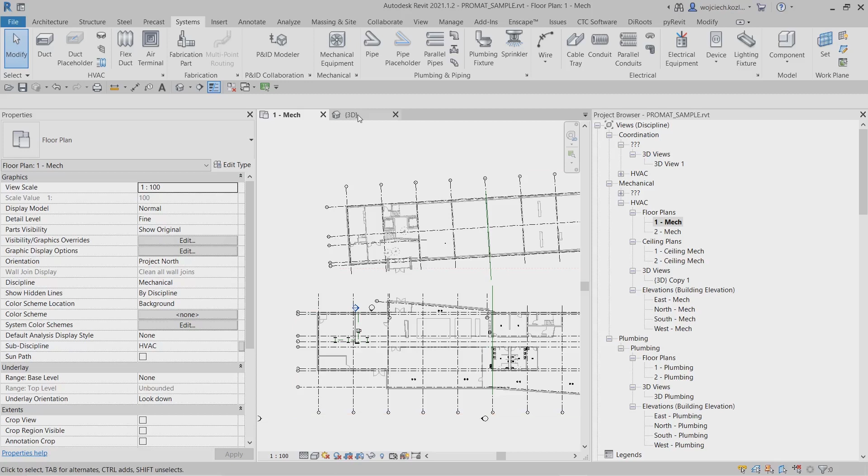In the next section of the film, I will present the process of modeling a part of the smoke exhaust system in a building using the Promat libraries. I currently have an open project that already contains a system component library.

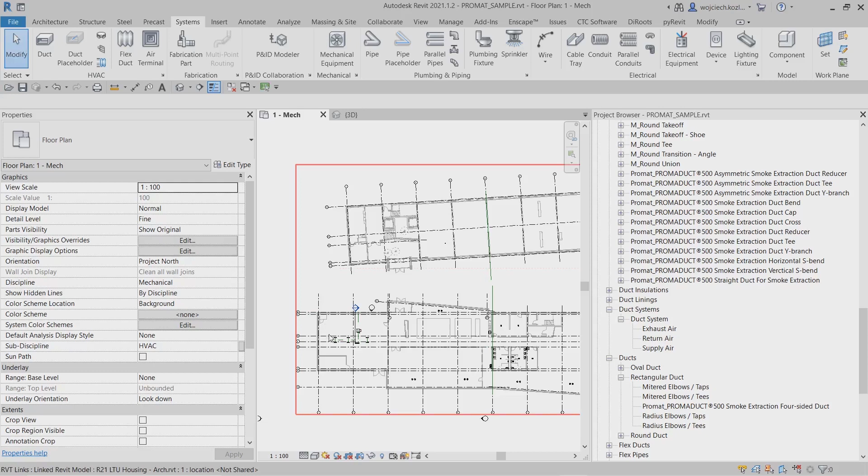The easiest technique to transfer libraries from a Promat template is to copy the content and paste it into an existing project in one Revit session. We can start the modeling process from defining the requirements, for example, the amount of air removed in a given room. We can place grills or set up a device, for example, a fan.

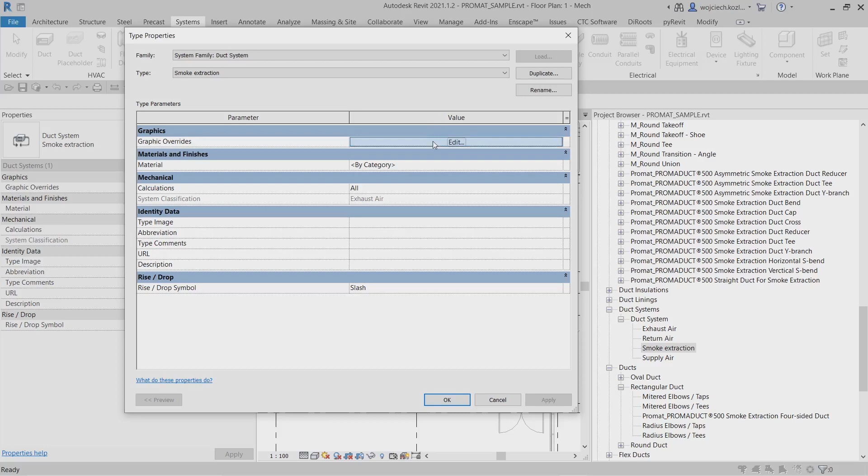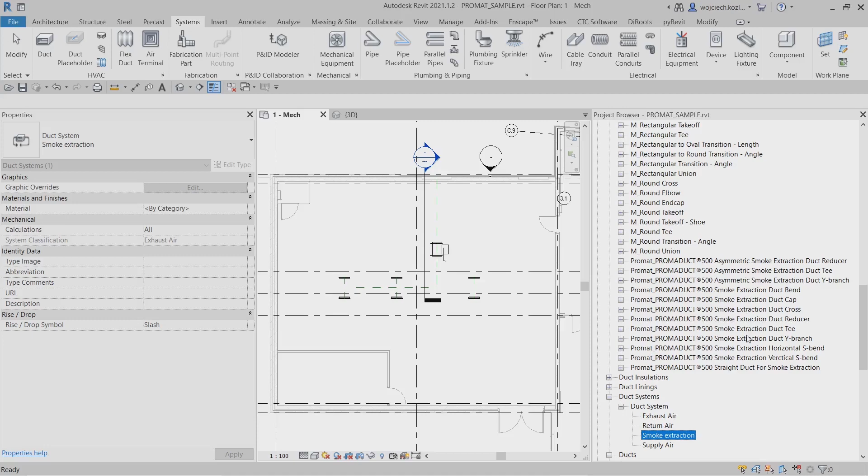Each system in Revit should be properly classified, so it's worth creating it by copying the existing one. In this case, it is the exhaust air system. After copying the Promat libraries, the smoke extraction duct system is already available for use. If we have already placed air terminals and equipment, the first step is to create a virtual system with linking elements in group.

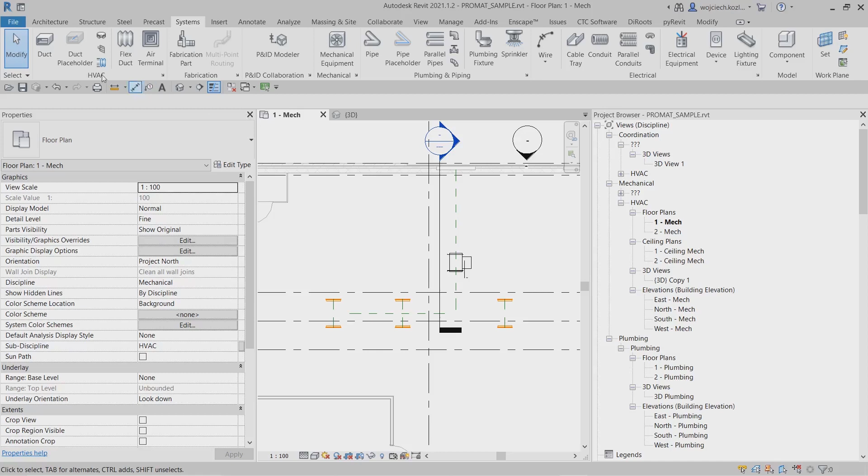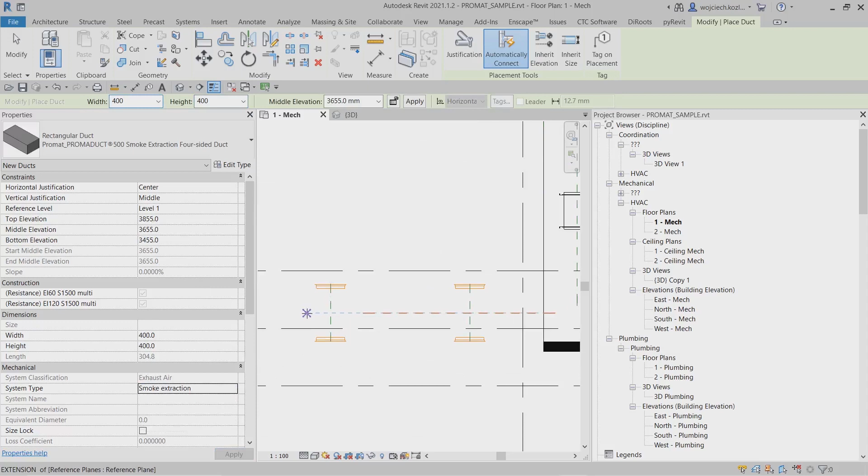In the next step, I will start by drawing a straight line segment with the Promat duct system. Before starting, we define the size of the duct as well as the elevation and the system type. Standard fittings are automatically created during the drawing of the ducts. The designer can modify the duct fitting using native Revit options. The elbow will automatically turn into a T.

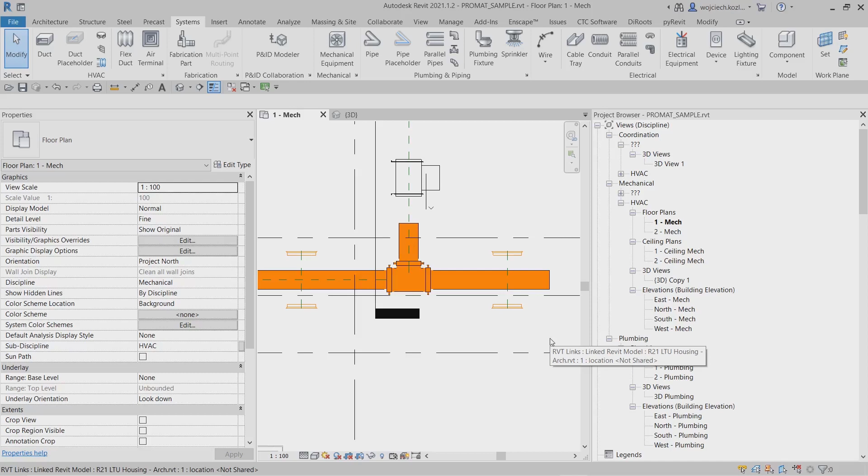If you want to draw the duct further, it is enough to select the fitting and use the Quick Drawing option coming from the duct connector. Connectors that have predefined dimensions.

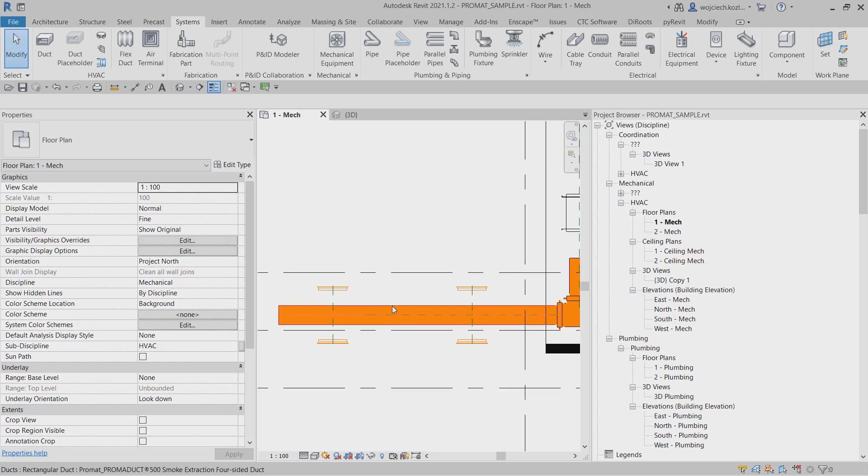In the next step, I want to draw a cross connection. In this case, you can draw two intersecting ducts, but this will work correctly only for standard cross fittings that have the same height on all outlets. In the case of the Promat cross fittings, it is also possible, but I think it is better to draw a T first and update it to cross. Thanks to this, we control which connector is the main and which is secondary, with a different height.

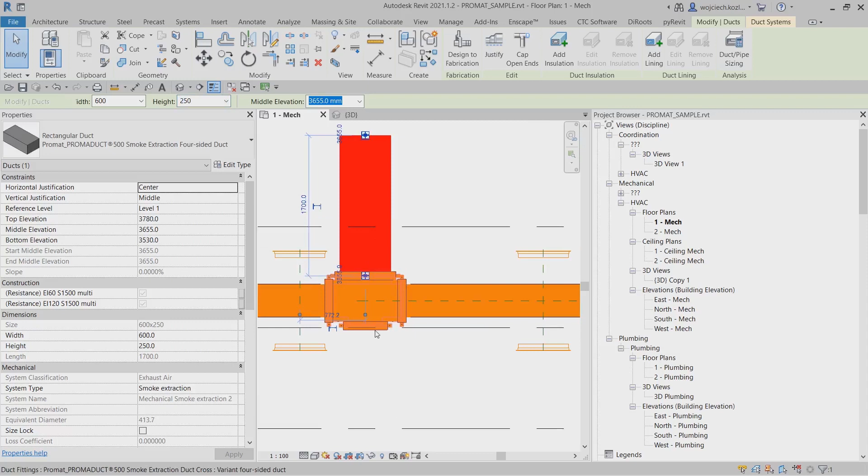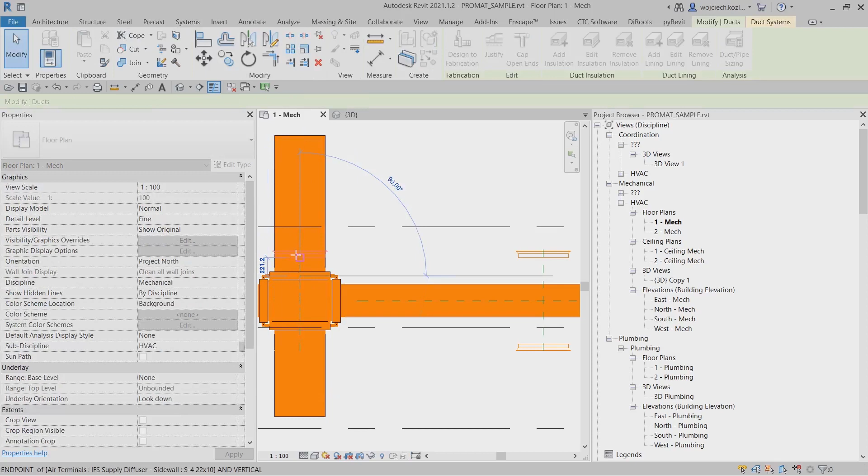After placing the cross fitting, you only need to draw the connections between the grills. Such a configured connection can be copied to another similar place. In the case of copying, you will often need to break the duct into smaller parts or delete and redraw it. I will finish the rest of the places in the same way.

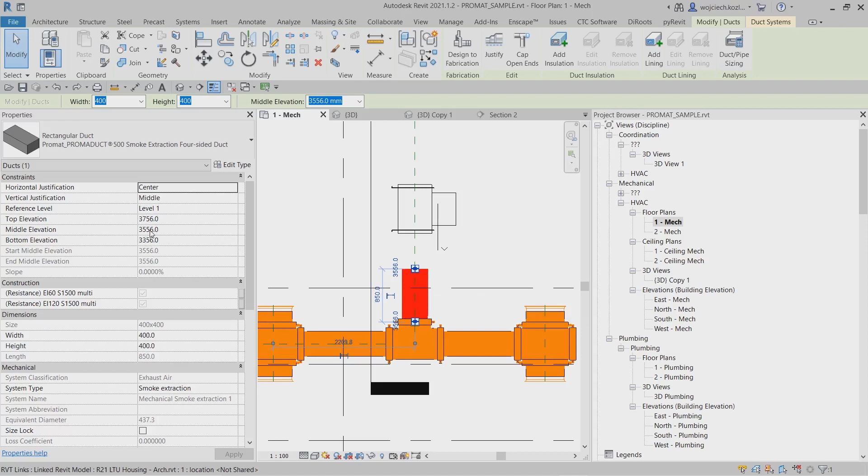Let's move on to a non-standard fitting. In this example, the axis of the duct is not on the same elevation as the fan. Therefore, I will use a vertical offset. First, non-standard elements should be placed on the existing duct and then adjusted to the project using parameters.

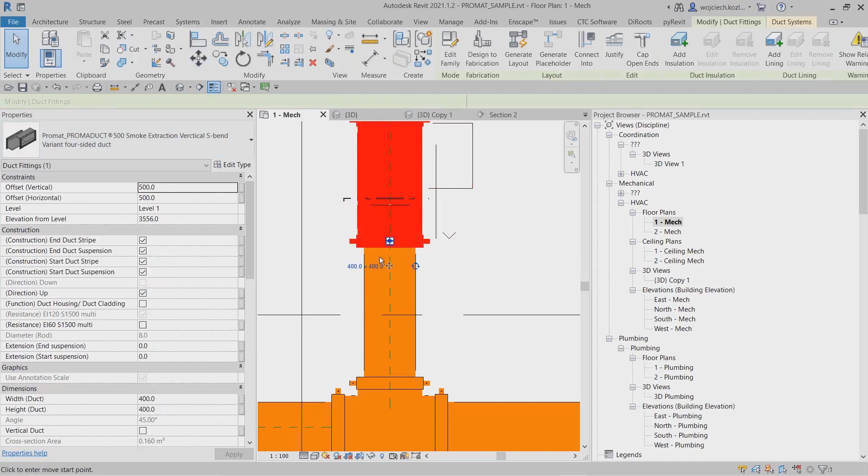In order to see how far I move away from the duct, I will create a section view and measure the distance. Then, I will set this value into the Promat family using the dedicated parameter called Offset (Vertical).

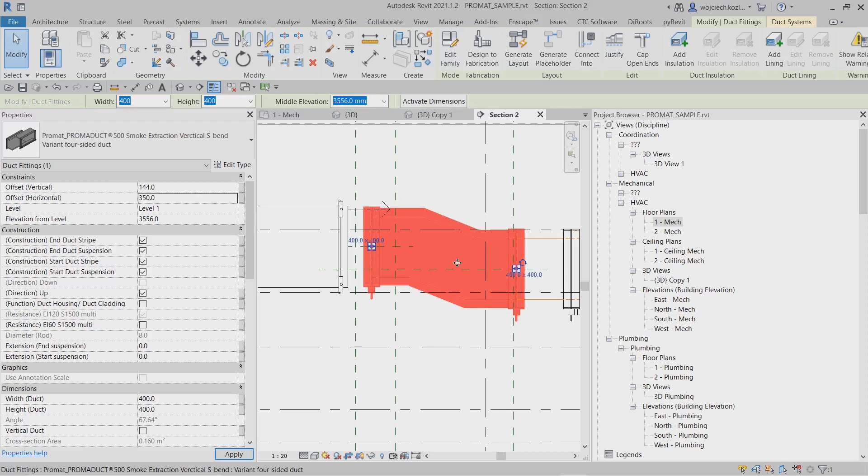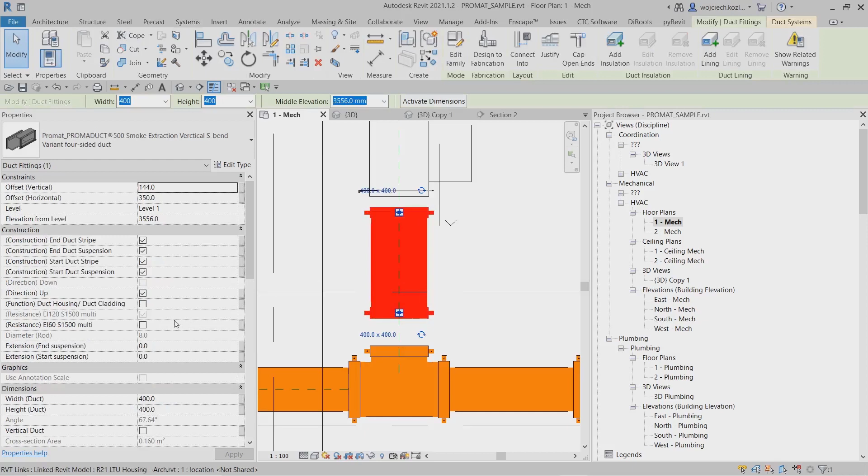The user can also connect the fittings with each other to optimize the design. I remove the straight duct segment, turn off the unnecessary stripes and suspensions, and finally grab the connector and move it to the T-fitting connector.

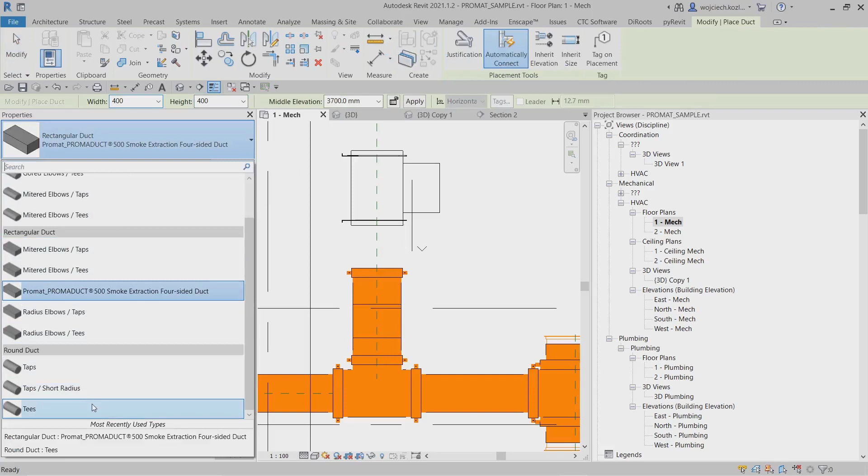Finally, I need to connect to a device that has a round connector. In this case, I will use the Revit General Family Multi-Shape Transition. Moving on, I start modeling from the device to the grill mounted in the wall.

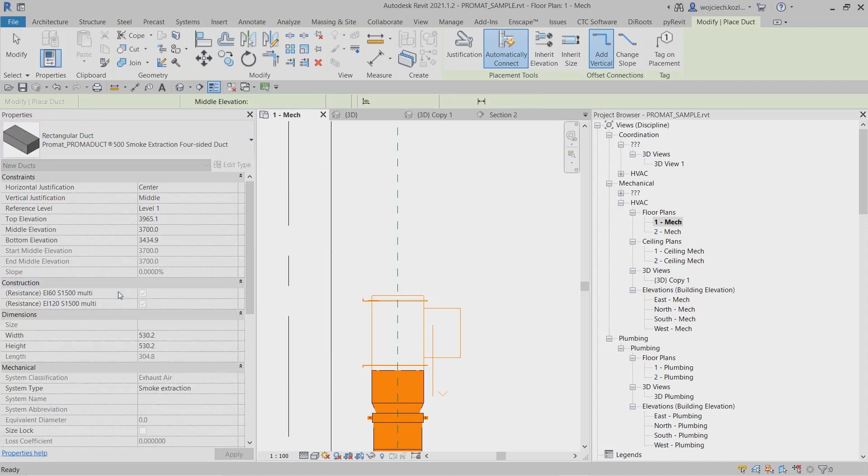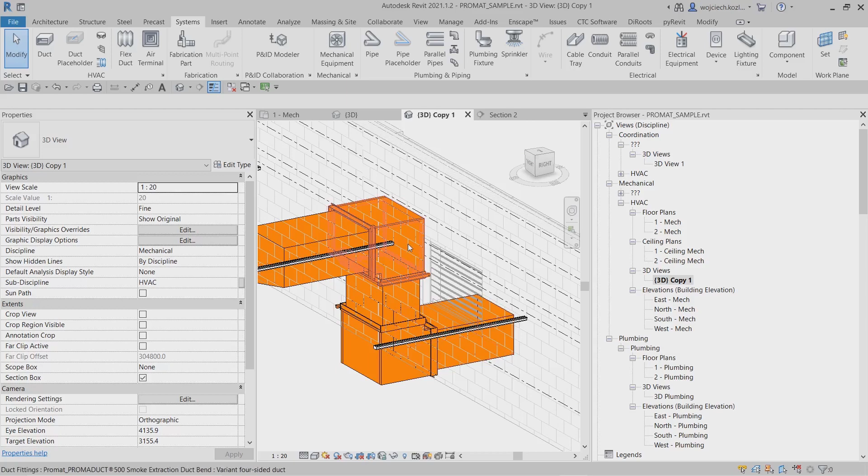I start again with a rectangular duct with dimensions, for example, 1600. I go down to the lower elevation by entering it in the option bar. As you can see, Revit has created an automatic connection consisting of 2 elbows and a vertical segment. Finally, I have to adjust to the grill by changing the size of the duct.

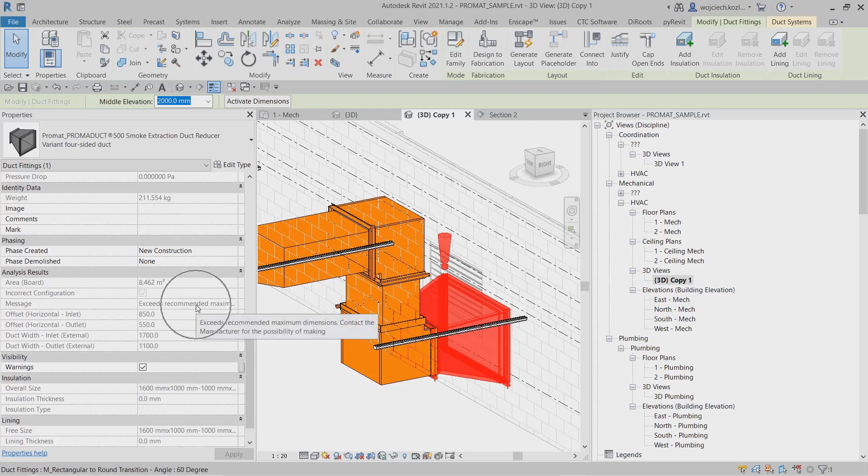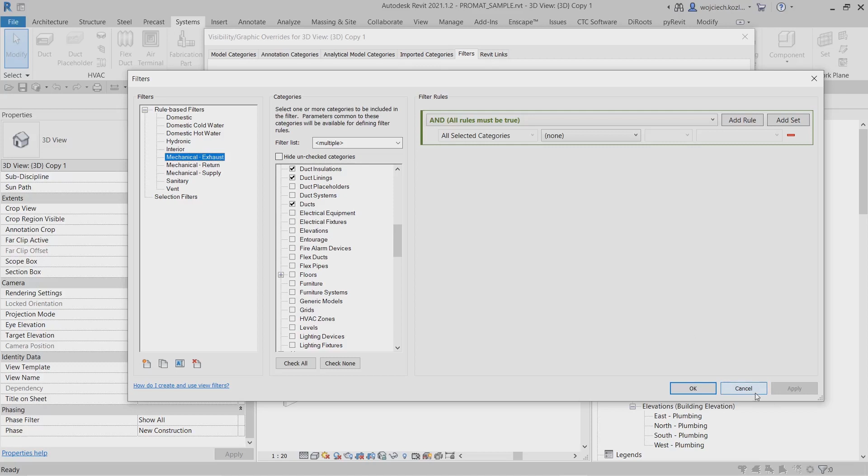To present the smoke exhaust system well, we can also create a filter that we place on the view. This filter applies to the smoke exhaust system, and the rule applies to the type of this system. I set the color for the system using graphic overrides.

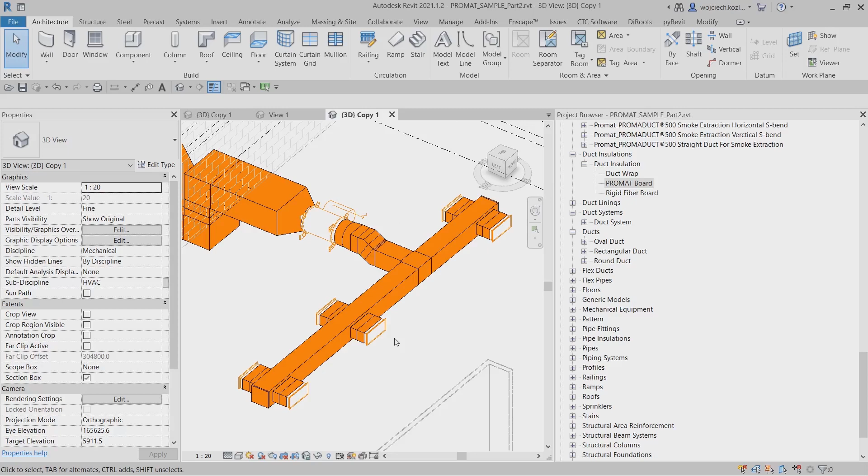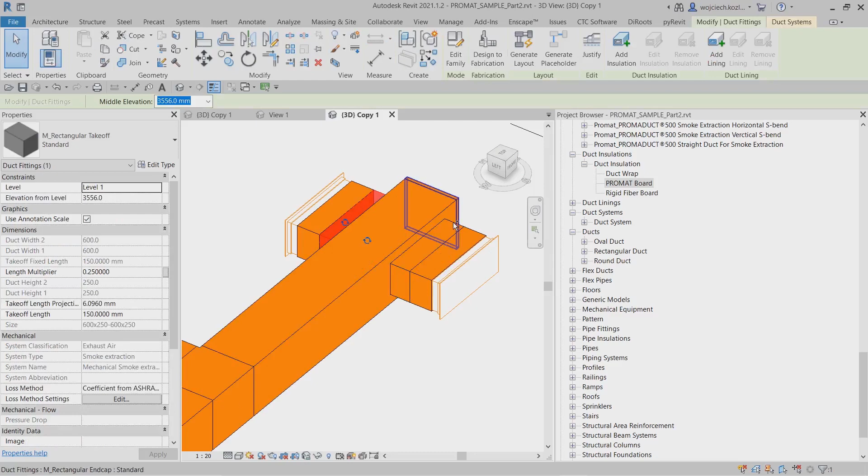Another scenario that may appear in the design process is to replace existing ducts with the Promat system duct. As we can see from the example, the duct system was designed with general fittings. First, analyze the existing ductwork and disconnect it in non-standard places. In this case, the ducts are connected by takeoffs, so we also remove them.

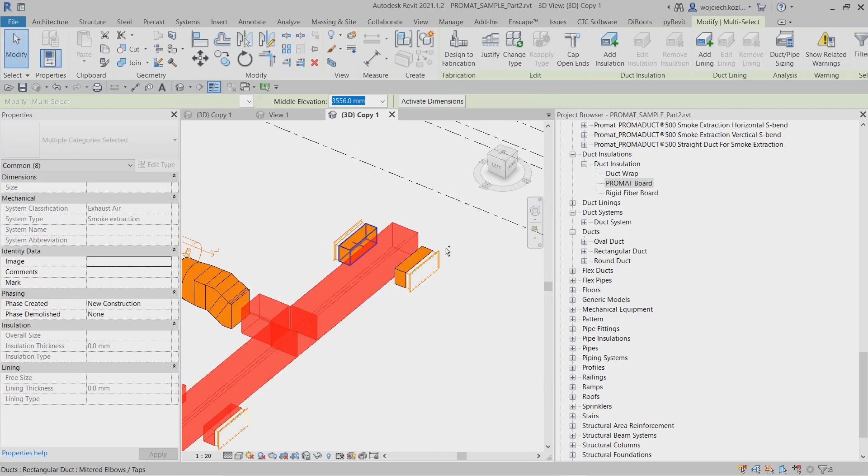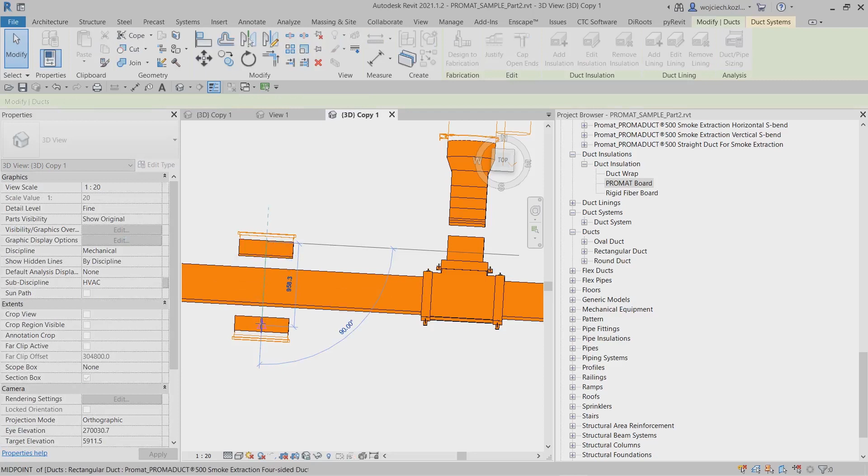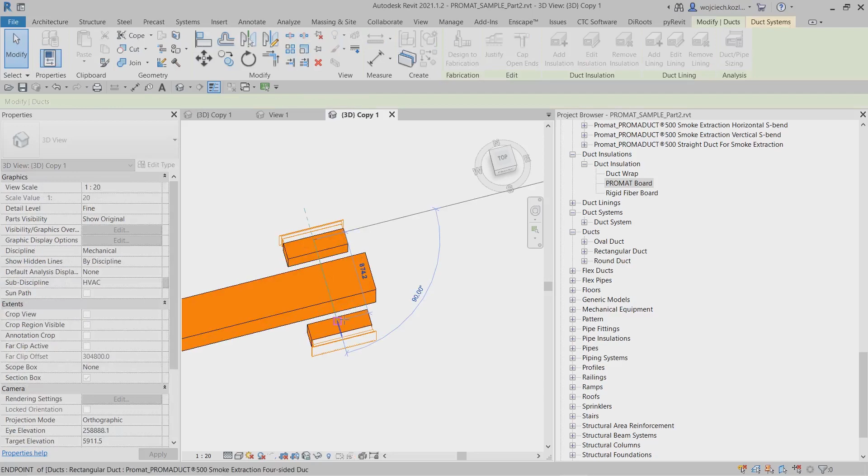In place of the takeoffs, we will insert crosses. An important step is to change the run type to Promat duct system. At the end, we should correct the places where the crosses are to appear. A system message may appear during the conversion regarding the removal of ducts that are too short. We finish the ductwork by automatically closing the crosses.